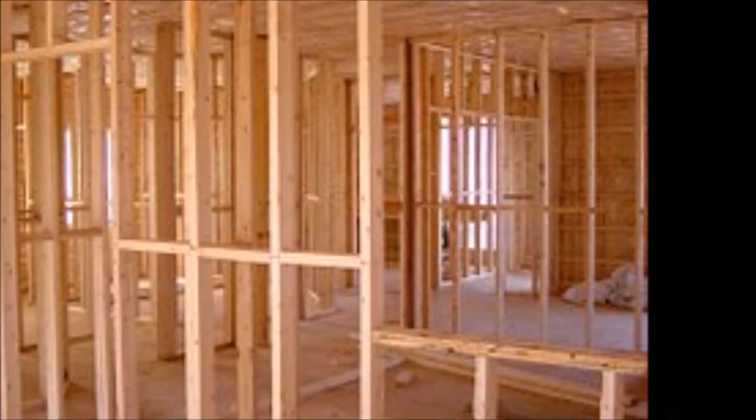Teams and roles during the building process: Team Principal Engineer and Project Design Engineer is Alex Gonzalez. Team Lead Design and Engineering Project Management is Andrew Dalrymple. Team Lead Quality Engineer and Project Engineer is Victor Gruber.

The Ava Engineering staff has over 30 years of experience in the construction industry. The team is focused on environmental and sustainable single-family residential building projects. We use cutting-edge technology for design, project planning, record keeping, and tracking of our projects.

The following is an overall scope of services that the Ava Engineering team will bring to this project if selected as the engineering design firm.

Trust: a charge or duty imposed in faith or confidence, or as a condition of some relationship. Building trust, building green, building your future. Ava Engineering.

Trust in our relationship. Our relationship begins with the customer at the design process. Ava Engineering collaborates directly with you, the owner. Ava has an obligation to ensure the design meets your expectations. Ava specializes in design and construction of sustainable residential designs customized to each client. Ava combines modern technology with experience to create a design that you can trust.

Our team utilizes current technology, with innovative project management software to collaborate and manage ideas. The software allows our team to plan and manage tasks, track and share large amounts of data necessary for collaboration.

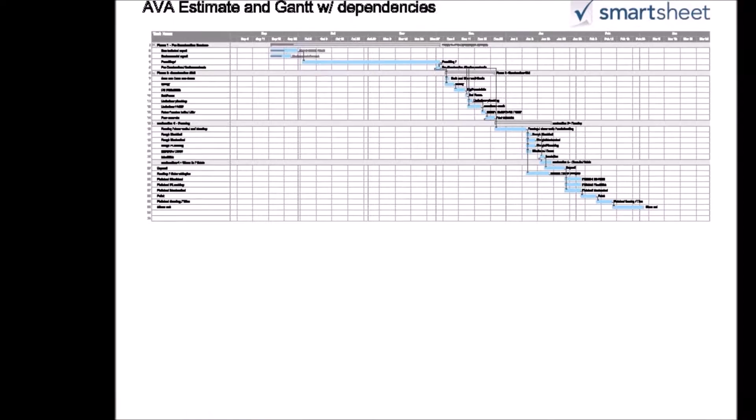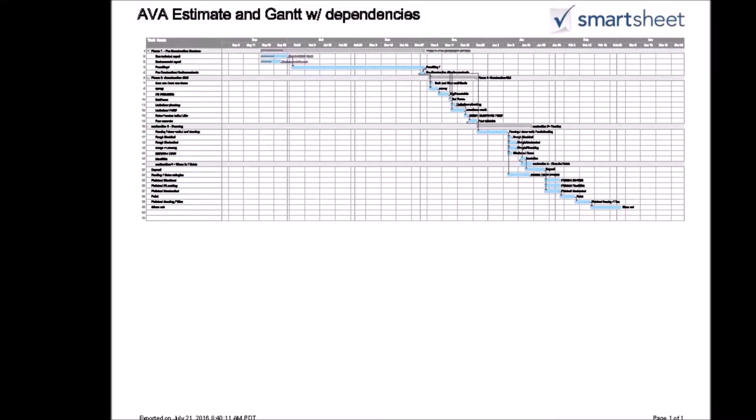Smartsheet allows our team to manage schedules. It tracks times and specific tasks, and allows Ava to forecast and aid in tracking construction progress. AutoCAD InDesign allows multiple users to share, collaborate, and create important elements of design. Ava Engineering uses collaborative technologies to bring a sustainable future to you.

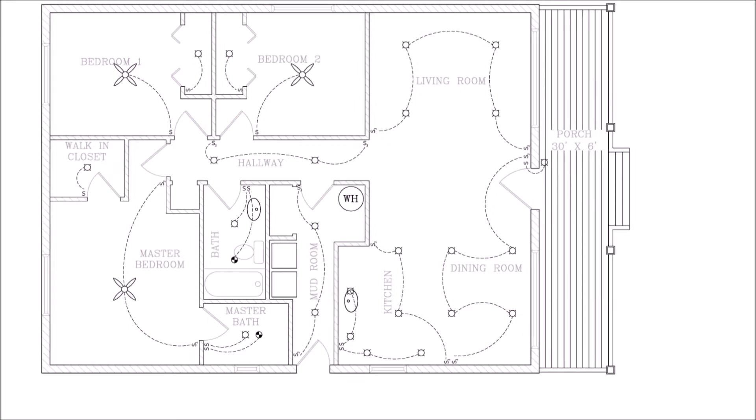National University wanted to design a 3-bedroom, 2-bath living space that is green and sustainable. The engineering staff at Ava Engineering utilized their expertise with sustainable construction to create a single-family dwelling located at 9388 Lightwave Avenue in San Diego, California.

Design and construction of green building was the primary focus of this project.

What is a green building? A green building is an environmentally sustainable building designed, constructed, and operated to minimize total environmental impacts.

Where does green building start? When creating or designing new projects, it's important to understand the concept of green building. Once we understand the concept, we can make an educated decision on our path to the future. Ava Engineering begins each project with you. We provide the tools, but you are the one that must decide which path to travel.

Green projects start with the basic design and space. The usable space should always be the first thing to consider. Consideration about the size of our footprint should always be a main focal point. Once a decision has been chosen, the green building experience begins immediately.

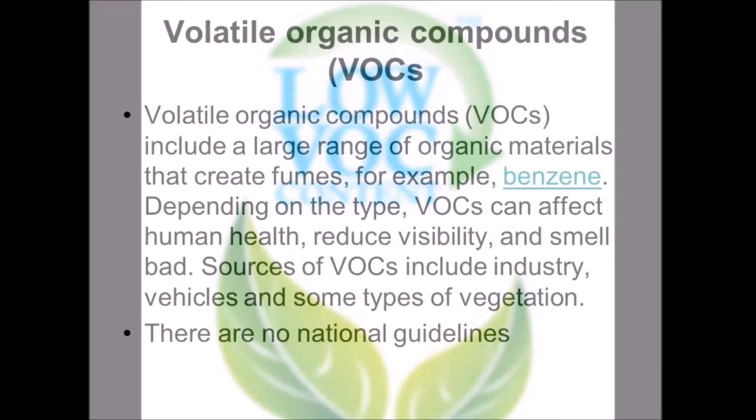Excavation should be used on site as opposed to removing excavated materials. The materials we utilize should be recycled and low VOC whenever possible.

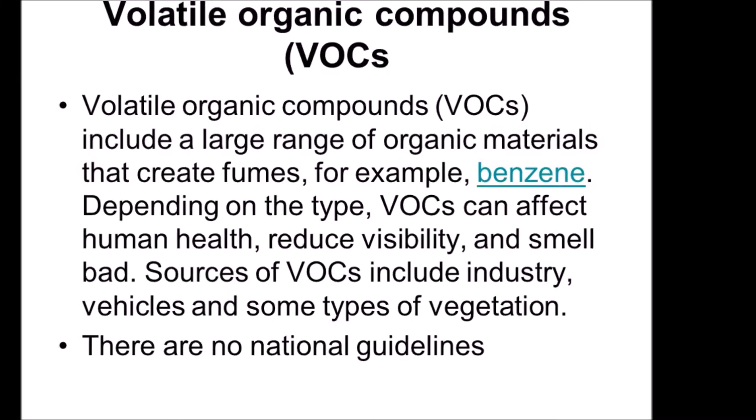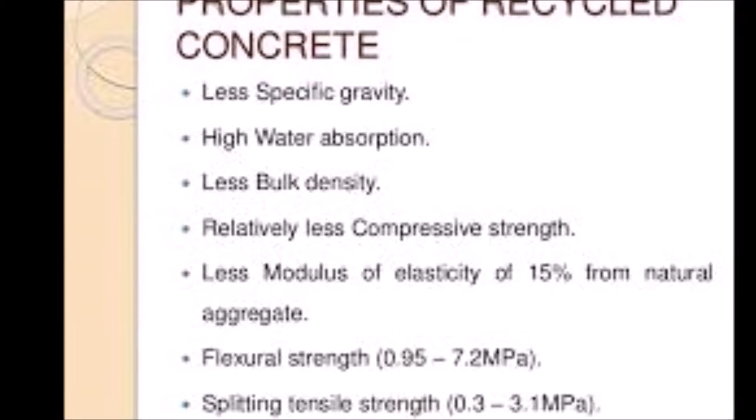As an example, concrete slab specifications: the formwork should be reusable whenever possible. Form release agents should be vegetable-based without petroleum solvents. Form supports should be 100% recyclable plastic content. Alternative insulated concrete forms, ICFs, are meant to be left in the ground after the concrete has cured.

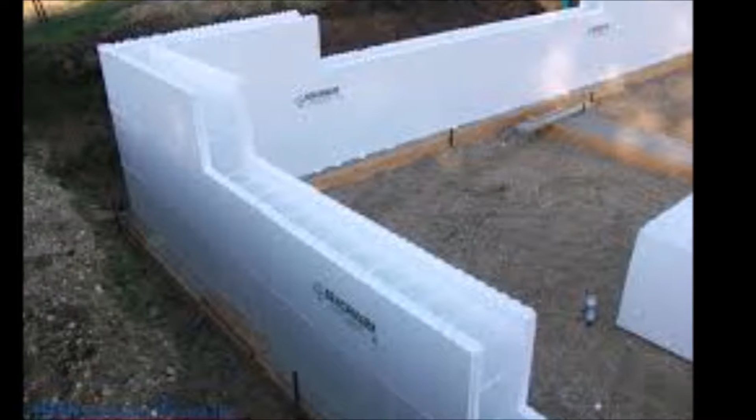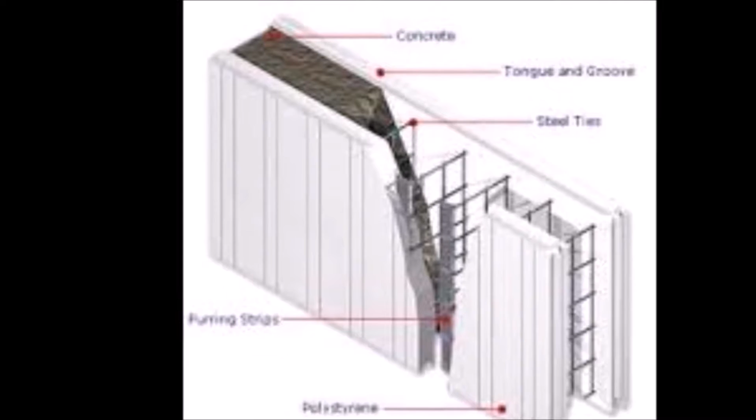Concrete specifications include mandatory recycled material and low VOC mixtures, which we'll expand on in a minute. Concrete admixtures should be verified bio-based curing agents, with no calcium chloride. Reinforcement bars and rebar should have a minimum of 50% recycled content. Concrete joint filler strips should be made with cork or other approved materials.

Materials are an important part of building green. You can trust Ava Engineering to use the right material for your project.

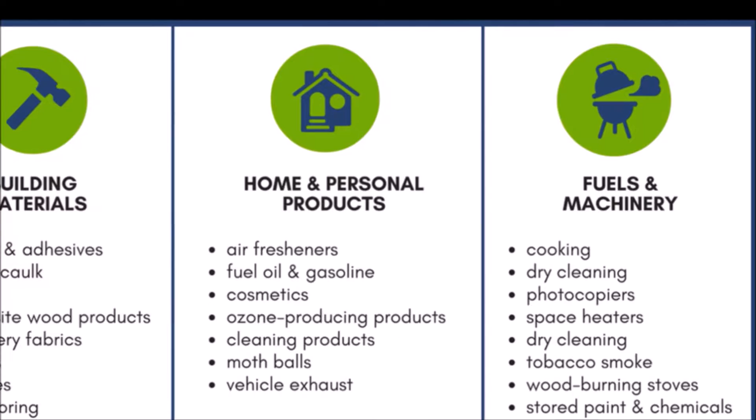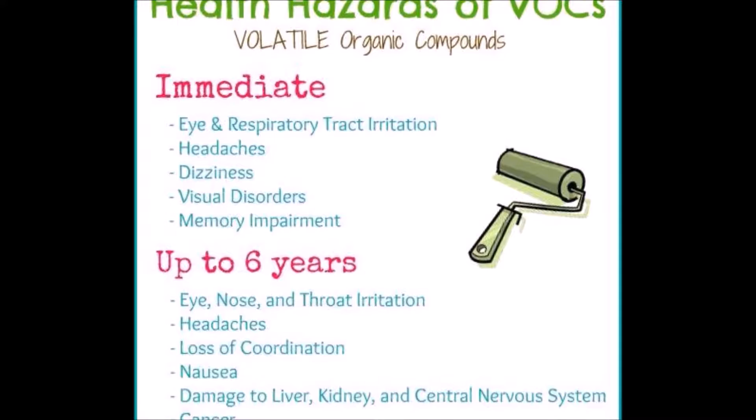What is low VOC? Low volatile organic compounds. VOCs are organic chemicals that have a high vapor pressure at ordinary temperature. They have large numbers of molecules that evaporate or sublimate and enter the surrounding air. Common chemicals you may know are benzene and formaldehyde.

Most compounding long-term VOCs do not have acute toxicity side effects. That means we do not notice we are in trouble till it's too late.

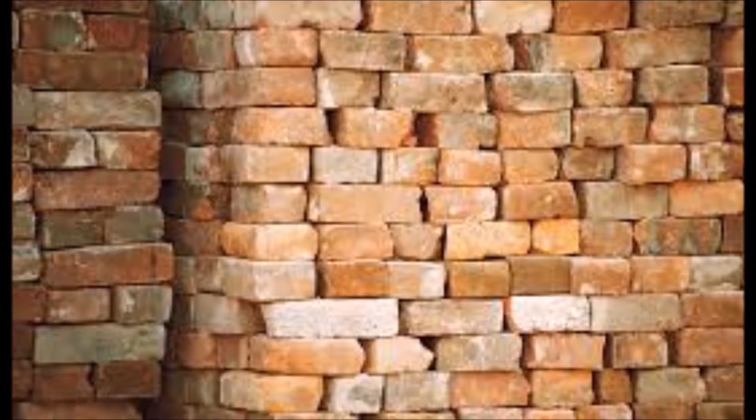Reducing the use of materials that emit pollutants is the most effective way to improve indoor air quality. Trust in the building materials and contractors installing materials is a big part of green building, and trust in the care of what is being installed in your family's living environment.

While considering improving the air quality in your family's house, we consider the performance and absorption of all building materials, the chemical characteristics, and alternative building materials. These considerations are made obvious within our specifications.

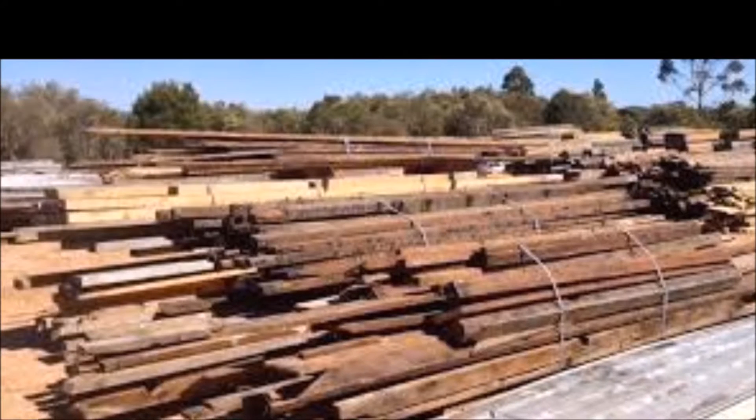Ava Engineering Material Specifications: our wood products shall be treated with chemicals that do not contain arsenic or chromium. Headers made of foam insulation sandwiched between wood veneers use wood efficiently and provide better thermal insulation. The EPS foam cores are non-ozone depleting.

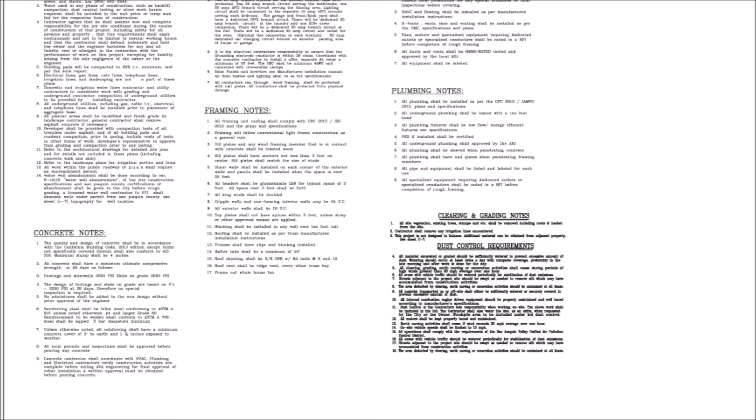Natural-based caulking and adhesives. Recycled Fiberock panels are made from synthetic gypsum, perlite, and recycled newsprint paper with a total recycled content of 95%. Murco Wall Products makes a hypoallergenic powdered dry mix all-purpose joint and textured compound that is no VOC and does not contain any preservatives. 100% recycled ceramic tiles with organic epoxy adhesives. Bamboo flooring from a sustainable source.

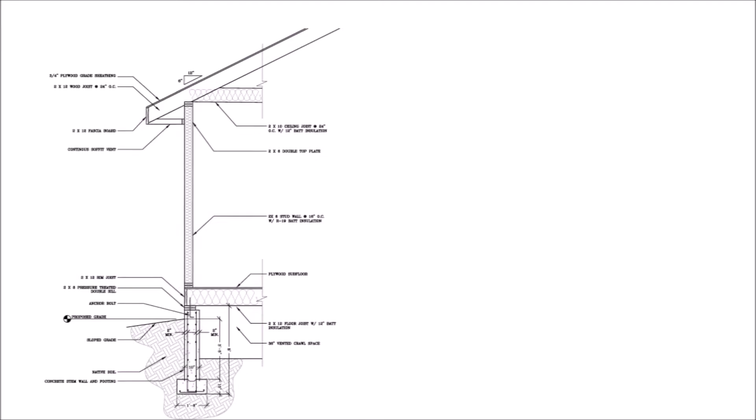These are just a few of the specifications that can make a big difference when planning for your future. Trust in Ava to use the right materials for you and your family.

Trust is defined as a charge or duty imposed in faith or confidence, or as a condition of some relationship. Part of our relationship is expertise in green building design.

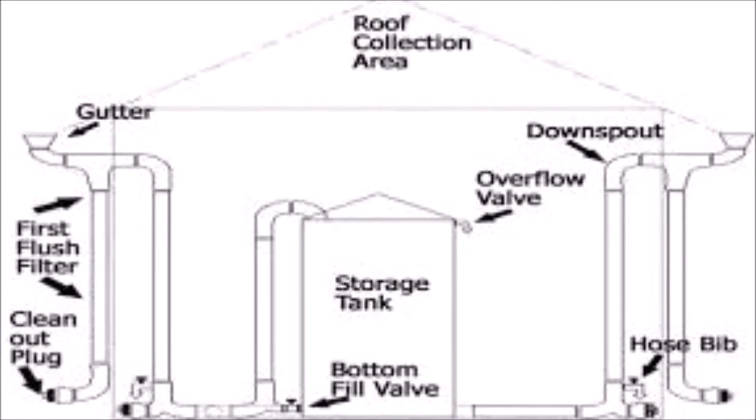Designing options such as gray water systems. A gray water system collects water from the showers and the sinks and the rain runoff from the roof. The system has chlorination and overflow prevention capabilities as stated in the specifications. The system uses a drip system for irrigation and has options for leaching or direct release into the building sewer.

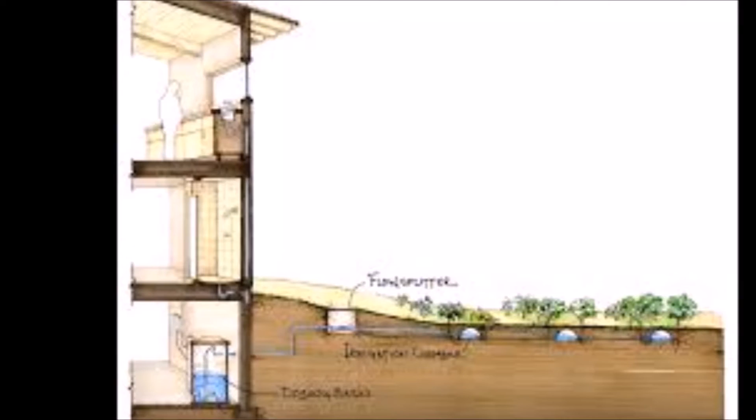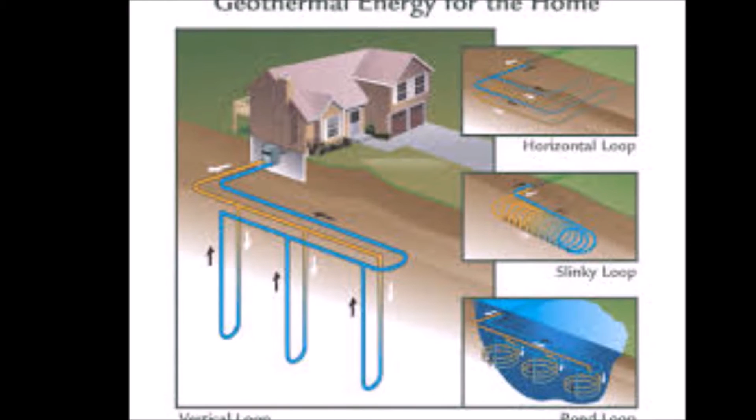Another option is geothermal cooling and heating. The system uses deep drilled wells and Earth's natural stable temperature to either heat or cool a residence. It uses enclosed hydronic tubing manifold and circulates the heating or cooling water throughout the house and through the wells drilled under the foundation of the residence. This unit lasts longer and requires less service compared to traditional HVAC units.

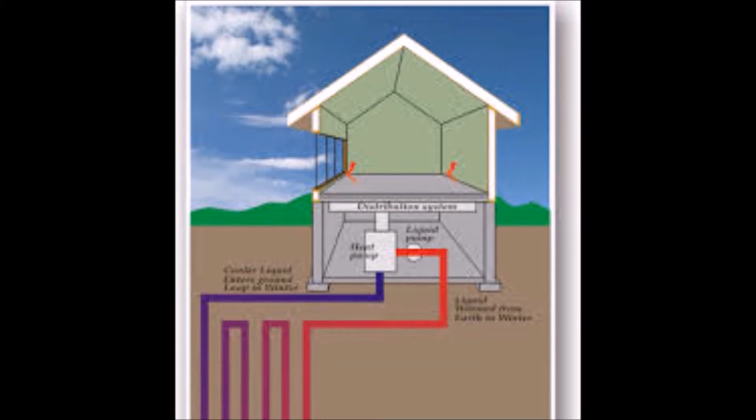Whole house fans and underfloor spaces will be vented and used to help effectively heat and cool the interior environment as well.

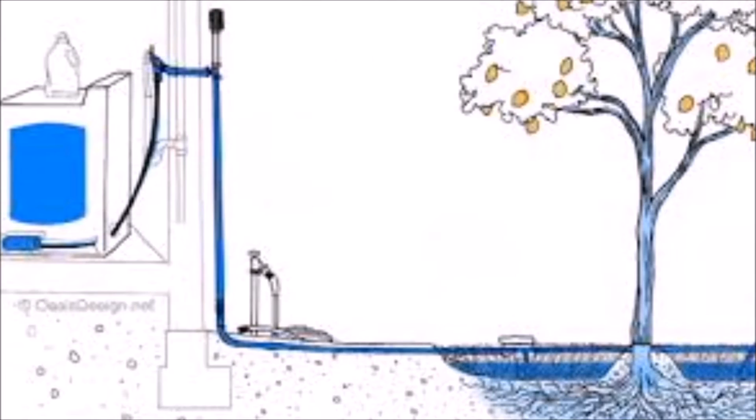Solar will be installed on the roof. This will aid in the sustainable aspect of the residence and will offset most of the electric usage. The yards will have low maintenance, low care landscaping that is native to the local area.

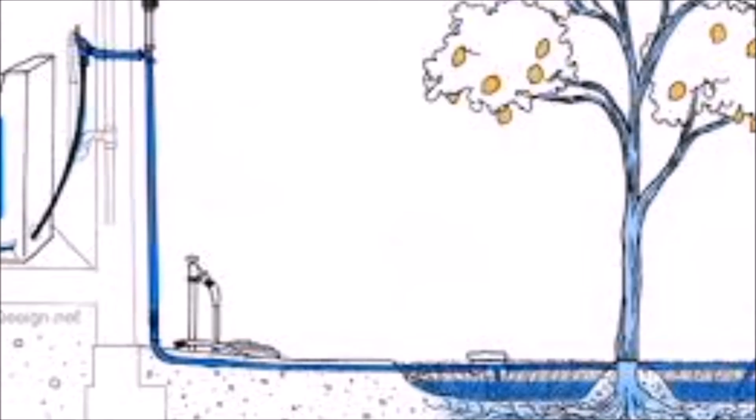Trust in the Ava Engineering project team not only deals with construction principles, but financial concerns as well. Trust is important when it comes to financial matters for your future. From day one, Ava Engineering has created detailed reports for budgeting, project labor costs, and construction timelines.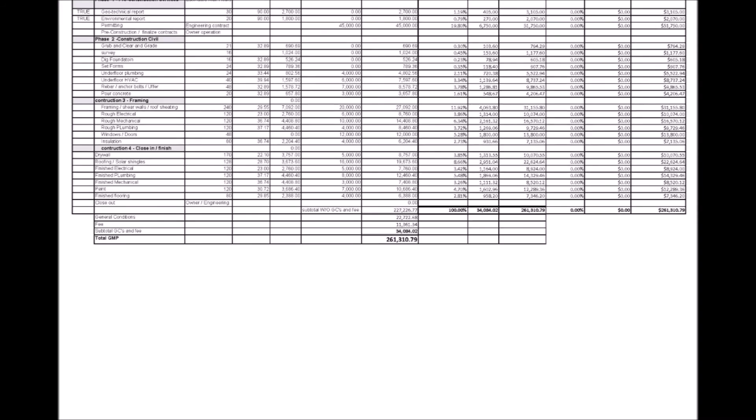This is where technology becomes important. Real-time project tracking through Smartsheet allows all parties to track production. Rich project management software allows tracking of project milestones, managing tasks, tracking schedules, workflow, and any changes during the construction process. Trust in Ava to build your future.